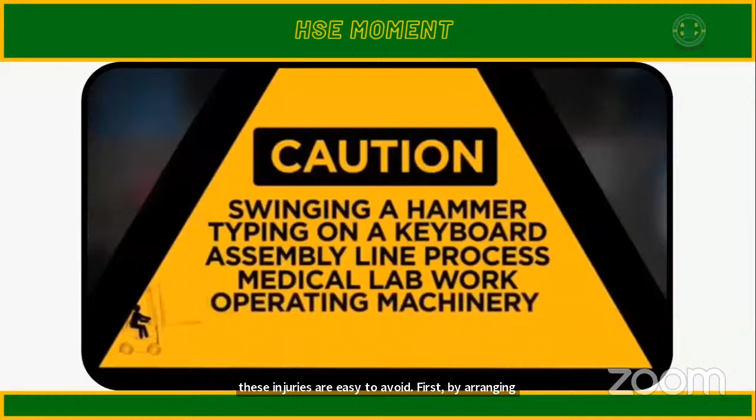First, by arranging your work area to fit you and support good posture, and second, by stretching. Stretches like this, or this, or this, well, maybe not that. Every 30 to 60 minutes can make a world of difference and prevent injury.

Show off. Let's recap. Ergonomics is all about fitting your work environment to you. So set up your station to support good posture. Be mindful of posture, reduce forces, and take breaks to stretch and realign yourself. Do all that, and you'll be on your way to being more efficient, more productive, and healthier.

Thank you for watching. Hope the message is clear about ergonomics. It is very essential for people who are working and sitting in offices. So take care of ergonomics.

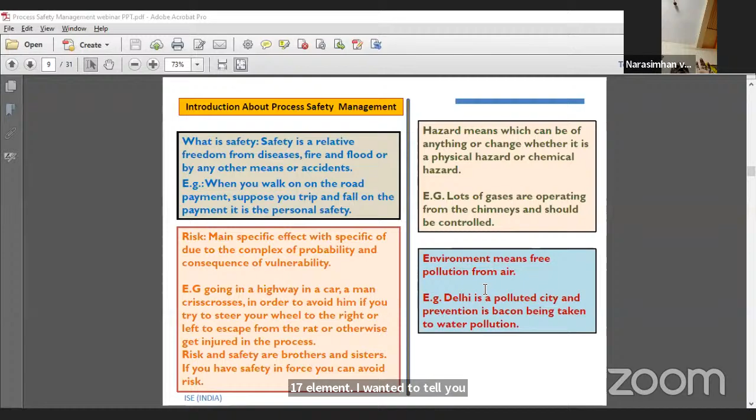I wanted to tell you how it happened in Bhopal, because one or two episodes you must know. Then you can know how the history was born. The Union Carbide of India, they have erected 2 plants at Jammu and Bhopal. They wanted to produce Sevin. They were taking MIC liquid from the Jammu plant to the Bhopal plant by rail tanker. They thought, why should we spend so much money on that? So they wanted to start in 1979 itself. So they made arrangements to produce Sevin on the Bhopal plant itself.

First of all, a lot of people were pouring the MIC liquid to the tank by buckets. 27 people got injured. The union spoke to the management about the irregular fire. Management did not heed their words. Then one chemical engineer got burnt when he was working with MIC liquid. He got 30% burnt and died. So regular safety management was not at all there. Union Carbide has not cared for the safety of the people or the plant.

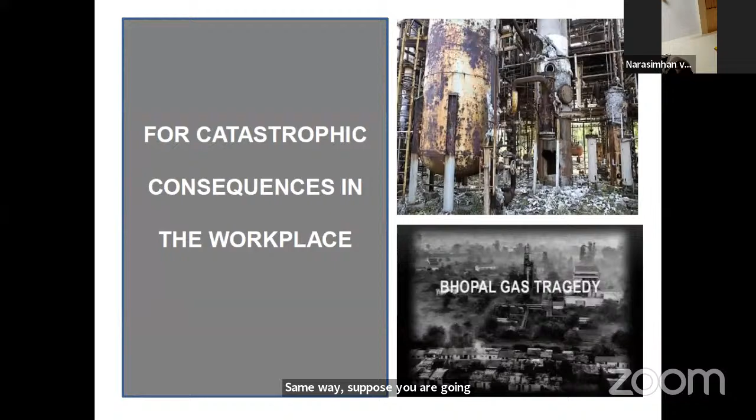For example, suppose you are going on a footpath and you trip and fall. You have to keep both your eyes on the footpath only. You cannot divert your attention to this side or that side. Your focus is only on the path. That's called personal safety. Same way, suppose you are crossing the intersection of the road and the amber light blinks. You have to be careful. You can cross the yellow line only when the green light comes.

Suppose you cross the yellow line when the amber blinks, what will happen? The crisscrossing of vehicles will hurt you. You get caught in the melee. Your life is lost forever. So that is also personal safety. I don't want to go further. I could talk about fire, floods, and so many things, but I don't have time. I have to rush through. Then we come to risk. Risk is a specific effect due to the complex of probability and consequence of vulnerability.

Suppose you are going on a highway and a man crisscrosses. I'm not talking about the Gulf or America. I have seen that American roads are perfect. I have visited America twice because my daughter is staying there. I have stayed for a year. I have seen that the road discipline is perfect. Whereas in India, we are making huge investments in construction, but still

road carefulness is not there. Suppose you are driving and a man crisscrosses the way, what will you do? You have to turn the wheel to the right or left, or in the middle you will get caught and get injured yourself, or the other man will be hit. So, the complex of probability: you may not be aware that you are going to hit the man or get injured. Complex of probability and consequence of vulnerability. The consequence of vulnerability you don't know. So this is the risk.

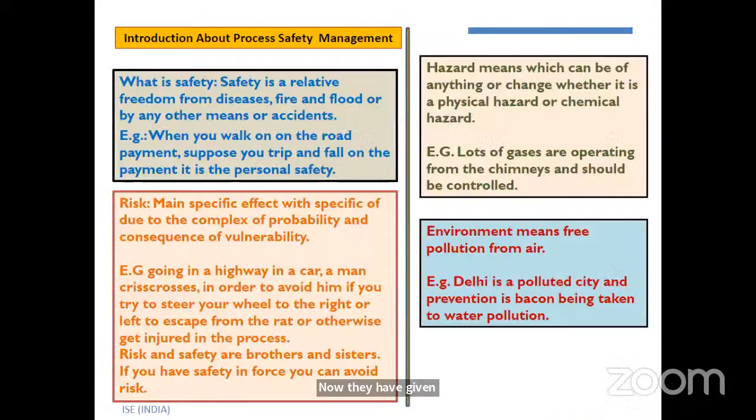So I am coming to the webinar on process safety management system. First, under the US Occupational Safety and Health Administration, they had only 14 elements. Now they have given 17 elements. That is process safety information, process hazard analysis, operating procedure,

training, contractors training, pre-startup safety review, mechanical integrity, hot work permit, management of change, incident investigation, emergency response and planning, compliance audit, trade secrets, and employee involvement.

So the process starts. Develop safety information, identifying the workplace chemical process hazard, equipment used in the process, and technology as well. Perform your workplace hazard assessment, including identification of potential reasons of accidental release. Develop written safety information for the workplace.

Suppose I have worked in an ammonia terminal for about 10 years. I was the chief man till my retirement. So I should know what to do and what not to do. But during my days, people never cared for safety. My technicians, they never cared. So I would go at morning 6 o'clock.

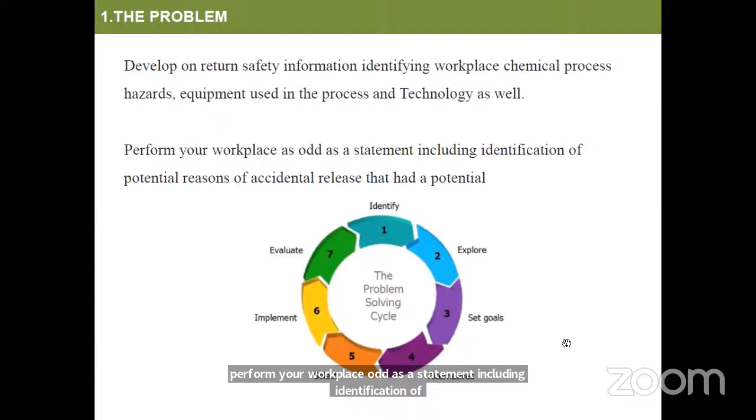So perform your workplace hazard assessment, including identification of potential reasons of accidental release. You can tell the people what are the possibilities of hazard release. Suppose you encounter ammonia when you are doing work, how to depressurize the system, how to start the ammonia pump, vertical pump. These are the basic criteria in the plant, how to start things.

So you have to identify what is happening. You have to explore the possibility of what you have to do. You have to set goals, how the people are knowing the plant well. Then the alternative. If they don't know, you have to give them alternative things, how to learn the plant. Select some 4 or 5 people under your guidance. Ask them to do it.

Implement the suggestions given to you, even though you are a well-known figure in the ammonia plant. If somebody is giving you advice, you have to hear it and implement it. That has to be evaluated every now and then. So this is the problem.

Now the standard works. Establish a system with respect to the workplace hazard assessment findings. We shall address prevention, mitigation, and emergency response. So if there is an ammonia leak, what do you have to do? You must act, then the hazard is coming.

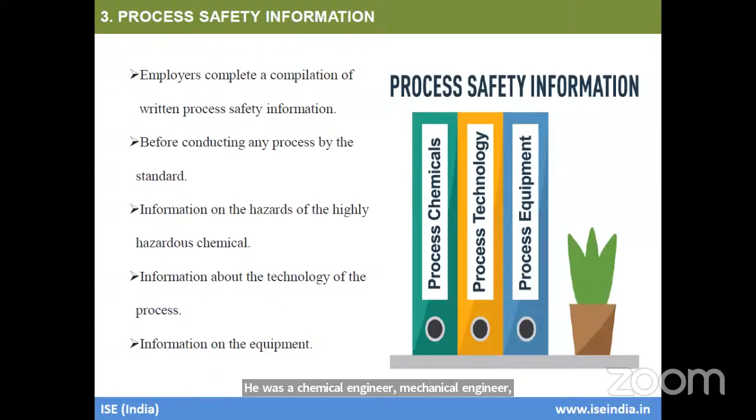When we wanted to start the ammonia atmospheric storage tank, nobody knew what was what. One German engineer came all the way. He was a chemical engineer, mechanical engineer, instrument engineer, and electrical engineer. I went along with him for about 6 months and did a lot of things. I came to understand the intricacies of the plant.

Then I was in the ammonia terminal for about 10 years, from 1997 to 2008. If any problem came, I would sit down with the people coming from far-off places, from Pune and so many places. If they wanted to take up centrifugal compressor performance, I would sit down. I never cared for my food or anything. I tried to learn things. That is the way of working.

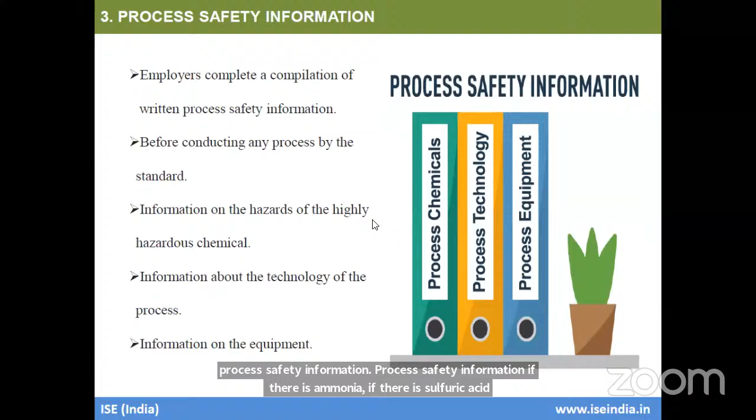So employers complete a compilation of written process safety information. If there is ammonia, if there is sulfuric acid, you must have compiled the basic things you should know about safety. Safety is more important. If there is a shutdown, we don't care. If safety is enforced, you can enjoy the running of the plant. Before conducting any process covered by the standard, it is a must.

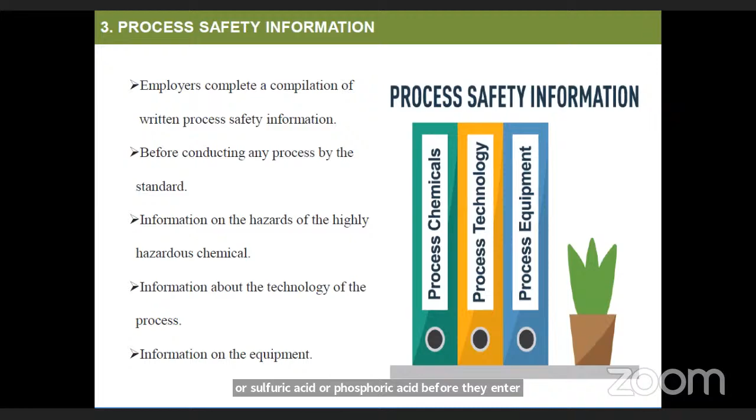Information on the hazards of the highly hazardous chemicals will be notified on the panel itself. Suppose ammonia, sulfuric acid or phosphoric acid. Before they enter the panel, that will be noted and displayed on the board itself. Information about the technology of the process you can get from the SOP, Standard Operating Procedure. Information on the equipment you will also get from the SOP.

So I am giving a small example. In 2019, I did a safety audit at a cement plant, Chettinad Cement Factory at Ariyalur. People are very well educated, but nobody knew the SOP. I got upset and gave it to them right and left. Bluntly, I told them: you are mechanical people, chemical engineering people; when you don't have the SOP on the panel, how can you run the plant?

They said, no, sir, we have so much experience. Oh, that is not the way. When you get into the plant, you must know the SOP, Standard Operating Procedures, and so many things about the plant. That we had in our plant in Coromandel International. When you visit the panel, everything will be there. I used to study the entire process in night shift. That is the way I cultivated my habit.

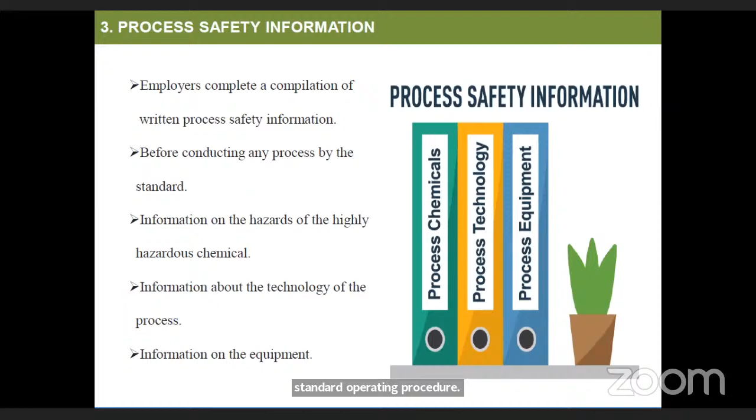Then process hazard analysis. Process hazard analysis is a thorough, orderly, systematic approach for identifying highly hazardous chemicals. So you must have process hazard analysis. You have to do HAZOP. The employer must follow methods like hazard and operability studies, failure mode effect analysis, fault tree analysis.

What is HAZOP? HAZOP has to be done before commissioning or after commissioning. Suppose they want to take it up, the team will consist of the process engineer, instrument engineer, general manager of the factory, the operators and mechanical people. All will sit together and conduct a HAZOP study on process hazard analysis. It is called hazard and operability study. I don't want to go into the details because it is a big subject.

Then they will discuss how the process is going on. Suppose there is a leak on the upstream side of the controller, what will happen? So they use guide words: no, more, less, no flow, more flow, as well as, part of, reverse and other than, using volume, temperature, pressure, flow and level. These are the basic ingredients with which they analyze the hazard study.

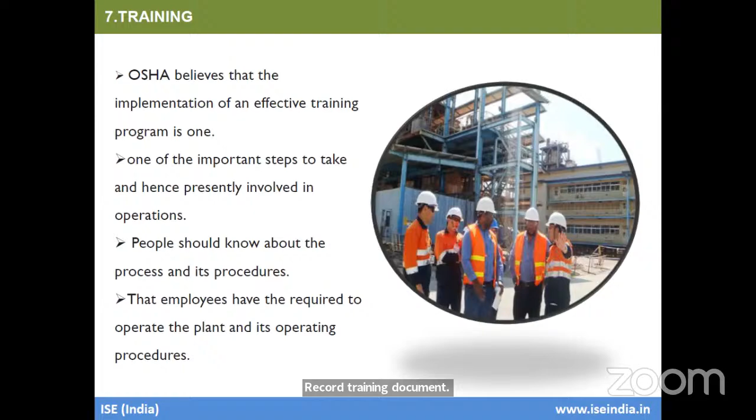Record training documentation. The record of the employee must contain their identity, the date of training, and how the employee is verified to have understood the training. So the record code of the employee must contain the identity of the employee, the date of training, how the employee was verified, and that the employee understood the training.

Documentation focused on what information, focused on when and why, communicates the facts, provides situational context for tasks, organized into small task-based chunks. It may contain chunks of documentation, provide user-directed navigation, measure learning with assessment, used as needed, used for a limited time. These are the basic things you must know about documentation and training.

Documentation and training are complementary tools that work together. It is possible that the right solution might be a combination of documentation and training to address the goals and challenges of the situation.

Contractors control. Employees may be present at a particular site and they should know all the procedures and processes of the particular plant. I have seen in a fertilizer plant where I was working, a monoammonium plant, where the contract workers knew very well about the plant, better than the paid permanent workers. That was the situation.